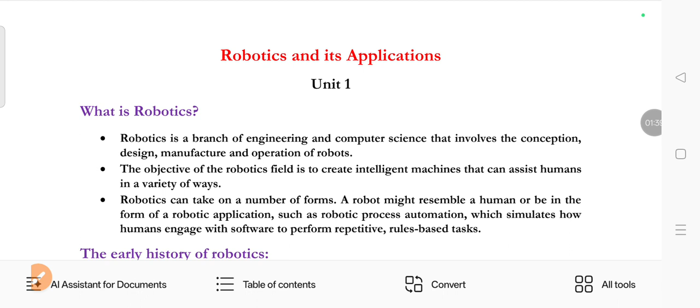Robots can take on a number of forms. A robot might resemble a human or be in the form of robotic applications. Let's see the early history of robotics.

Ancient concepts: in ancient times, as early as ancient Greece, myths described mechanical servants, which can be called automatons. In 1921, Karel Capek introduced the word robot in his play Rossum's Universal Robots. In the 1940s, Isaac Asimov formulated the 3 laws of robotics, emphasizing safe robot-human interaction. In 1954, George Devol invented the first programmable robot, Unimate, later used in General Motors factories.

At Stanford Research Institute, a robot dubbed Shakey followed suit in 1966 as the first mobile robot, thanks to software and hardware that enabled it to sense and navigate its environment in a limited capacity. In modern times, robots have evolved with developments in AI, sensor technology and computing power, leading to robots in industries, healthcare, homes and even space exploration.

Let's see the robotics applications. Today's industrial robots as well as many other types of robots are used to perform repetitive tasks. They can take the form of a robotic arm, a collaborative robot, a robotic exoskeleton or traditional humanoid robots. Let's see some of the applications of robots.

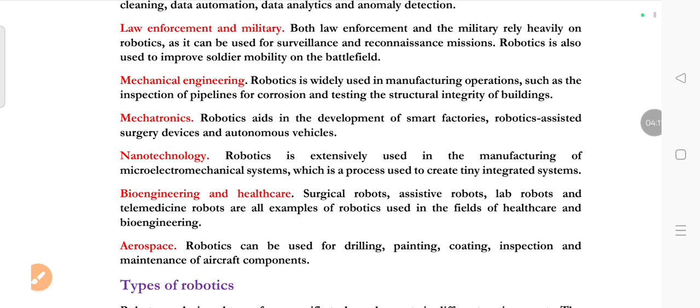Artificial intelligence is something different from robotics, but robotics is widely used with AI and machine learning for predictive maintenance and process automation. It can be used in data science, law enforcement and military, mechanical engineering, mechatronics, and even in nanotechnology, bioengineering and healthcare, and also in aerospace.

Let's see the types of robots. Robots are designed to perform specific tasks and operate in different environments. Let's see some of the common types. Industrial robots can be used in industries to perform welding, painting, assembling, material handling, and similar tasks.

Service robots: examples include cleaning robots, entertainment robots and personal assistant robots. Medical robots assist healthcare persons; robotic surgery systems, exoskeletons, and artificial limbs are a few examples of medical robots.

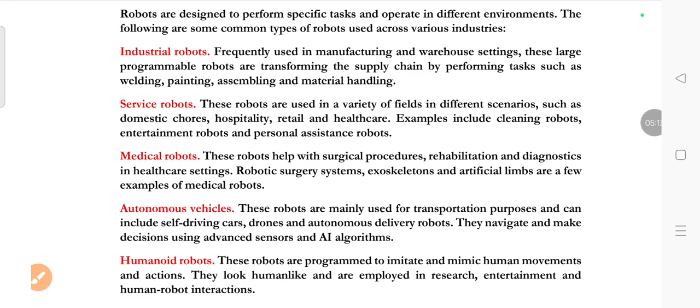Autonomous vehicles mainly include self-driving cars, drones, and autonomous delivery robots. They can navigate and make decisions using advanced sensors and AI algorithms. Humanoid robots take on a human-like structure and are employed in research, entertainment, and human-robot interaction.

Cobots, or collaborative robots, can share workplaces with human employees, enabling them to work more productively. Agriculture robots can help farmers in planting, harvesting, applying pesticides and checking crop health.

Exploration and space robots can be used in space missions. Defense and military robots are specifically designed to operate in unknown territories and assist with military tasks.

Educational robots are mainly involved in the education of kids; they can be used for programming and problem solving. Entertainment robots are created purely for entertainment purposes, and can act as a pet, a humanoid companion, or interactive toys.

Then, components of robotics. Key components include sensors, actuators, control systems, and sometimes end effectors. These components are used to perform tasks autonomously or semi-autonomously. These are the components.

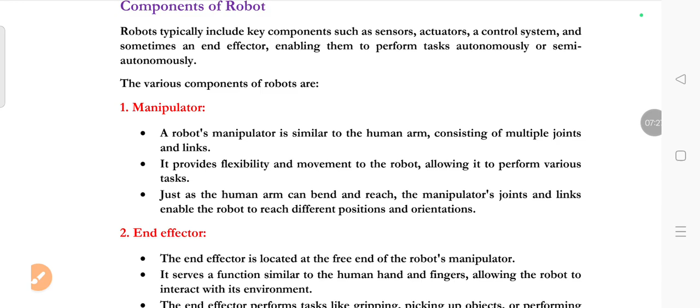The first one is manipulators. It is similar to the human arm and provides flexibility and movement to the robot. Just like a human arm, it can bend and reach different positions and orientations.

End effectors are the tools or devices at the end of the robotic arms, like grippers and welding torches. The end effector performs tasks like gripping, picking up objects, or performing precise actions.

Locomotion device is like a motor that provides the power needed for the robot's movement. They come in various types including electric, hydraulic, and pneumatic.

Controller: the controllers act like a brain that processes data and controls actions, including microcontrollers and CPUs.

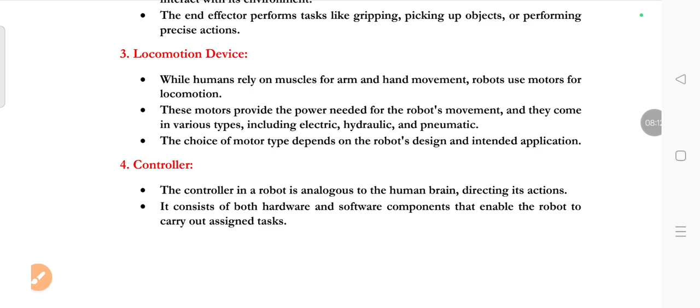Sensors are the most important part of robotics. They detect environmental conditions like proximity, temperature, and light.

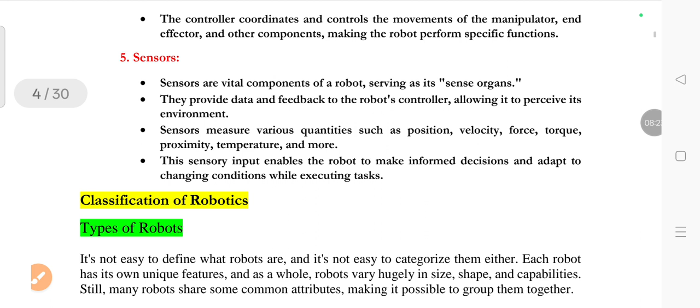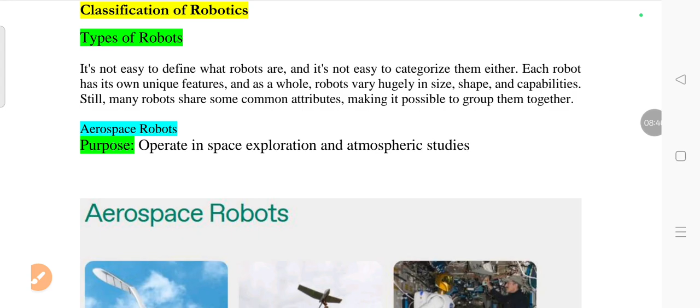Let's see the classification of robotics. Types of robots - I have given some of the robots used in different areas, and each robot has its unique features. As a whole, robots vary hugely in size, shape, and capabilities.

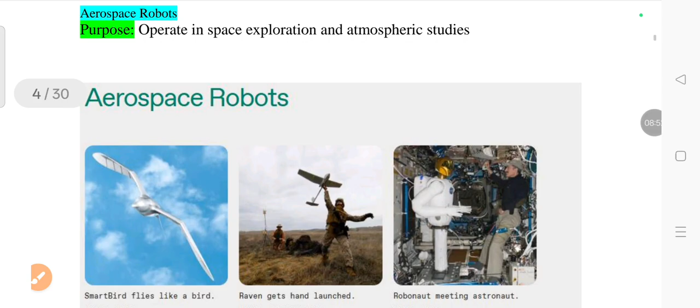Let's see some of the robots. Aerospace robots: the purpose is to operate in space exploration and atmospheric study. Here I have given a bird-like robot and a human-like robot. These aerospace robots are highly used in space exploration.

Then autonomous vehicles. The purpose of autonomous vehicles is self-driven cars, air or water vehicles. I have given a few examples. Robotic cars are equipped with cameras, lidars, GPS, computers, and other sensing and navigation systems that enable them to drive fully autonomously.

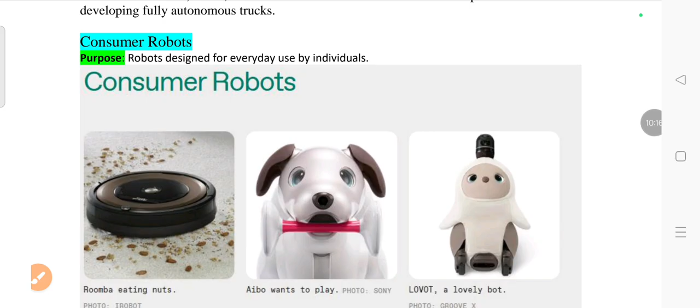Next one is consumer robots. The purpose of consumer robots is designed for everyday use by individuals. I have given a few example pictures. These are the robots you can buy and use for fun or to help you with tasks and home chores.

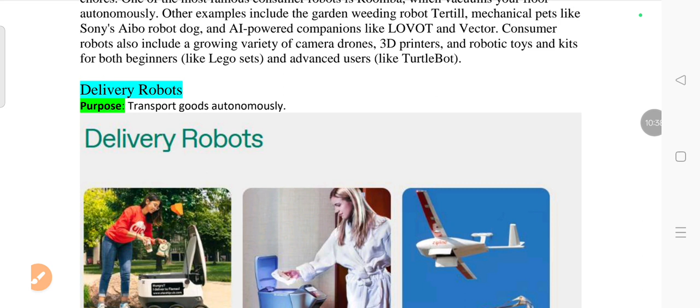Then delivery robots. The purpose of these robots is to transport goods autonomously. I have given a few examples: Starship robot, toiletries delivery, zipline parachute delivery. These robots transport items like foods, groceries and medical supplies from one point to the other.

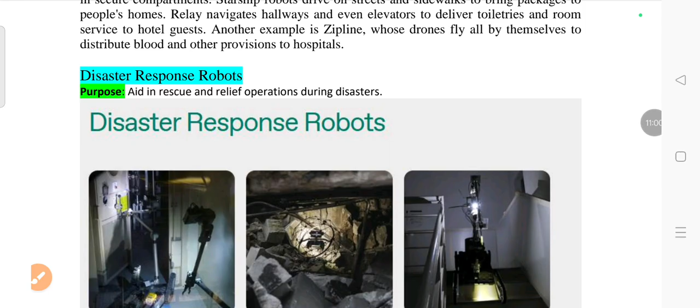Disaster response robot: the purpose of this type of robot is to aid in rescue and relief operations during disasters.

Drones: the purpose of these drones is unmanned aerial vehicles for diverse applications. Without the help of humans, we can use these types of robots for diverse applications.

Educational robots: the purpose of these educational robots is to teach robotics and programming to students.

Next one is entertainment robots. Purpose: amuse and engage users. The entertainment robots are designed to evoke an emotional response. They can make us laugh or feel surprise or wonder.

Exoskeleton: the purpose of these types of robots is as wearable robots to enhance human strength or mobility. These suits are equipped with electric motors that help move the user's body. Some powered exoskeletons can even give the wearer superhuman strength. Exoskeletons can be used for physical rehabilitation and can enable a paralyzed person to walk again, like Ekso and HAL robot suits. Some exoskeletons like the Guardian XO have industrial applications by giving the wearer added mobility, endurance, or the capacity to carry heavy loads. While using the exoskeleton we can feel like a superhuman.

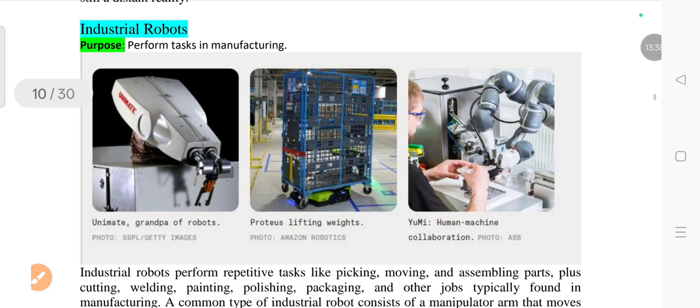Industrial robots: the next one is industrial robots. It is used to perform tasks in manufacturing, like picking, moving and assembling parts, plus cutting, welding, painting, polishing, packaging and other jobs typically found in manufacturing.

Medical robots: these types of robots are used to assist in healthcare and surgeries.

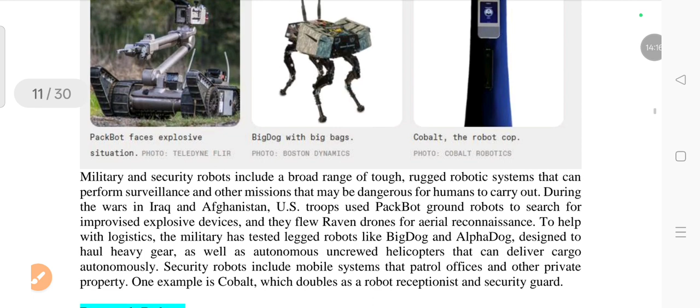Military and security robots can be used for defense operations and surveillance. They include a broad range of tough, rugged robotic systems that can perform surveillance and other missions that may be dangerous for humans to carry out.

The next one is research robots. These types of robots are experimental, built in universities and corporate research labs. Though these robots may be able to do useful things and some may fit other robot categories, they are primarily intended to help researchers do their research.

Next are service robots. These service robots perform useful tasks like cleaning, greeting visitors, or making deliveries.

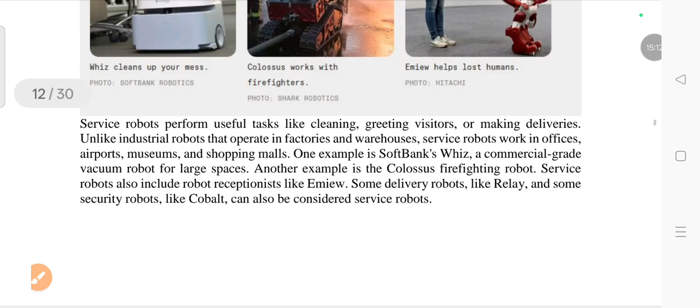The next one is social robots. Social robots are designed to interact and communicate with humans, assist us with daily tasks like grocery lists and calendar events, or simply keep us company and make us smile.

Telepresence robots allow you to be present at a place without actually going there. You log on to a robot avatar via the internet and drive it around, seeing what it sees, hearing what it hears, and talking with the people you encounter in meetings or at a water cooler.

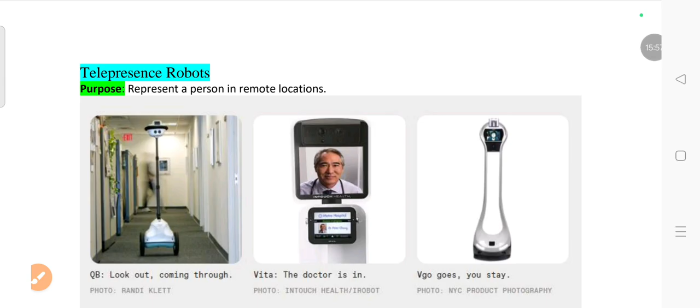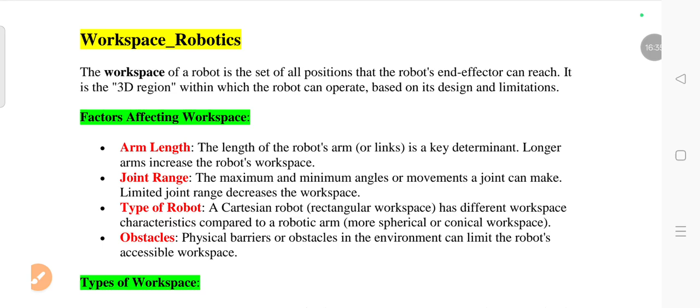So the next one is workspace robotics. The workspace of a robot refers to the entire volume or area the robot's end effector can reach. It depends on the robotic arm's length, number of joints, and range of motion. A large workspace allows a robot to perform more tasks without being repositioned. It's a crucial factor in robotic system design, especially in manufacturing.

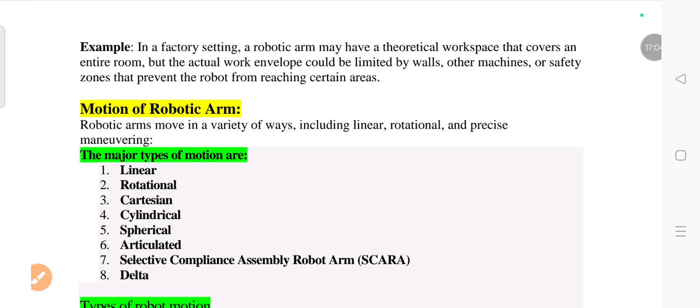Work envelope is the three-dimensional space in which a robot operates. It defines the limits within which the robot can move. Different robots have different shaped envelopes, like the Cartesian robot, which is rectangular box shaped. SCARA robots are cylindrical in shape. Articulated robots are spherical or irregular in shape. Knowing the work envelope helps in selecting the right robot for specific tasks.

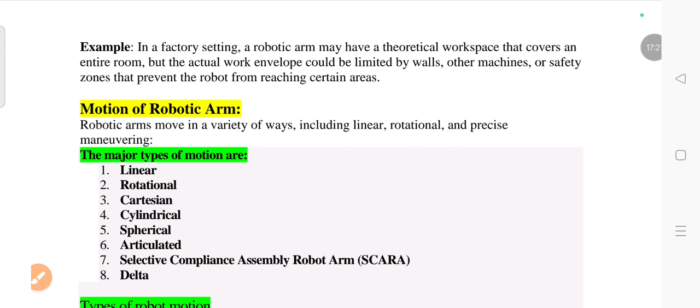The major types of motions are linear, rotational, Cartesian, cylindrical, spherical, articulated, SCARA, and delta.

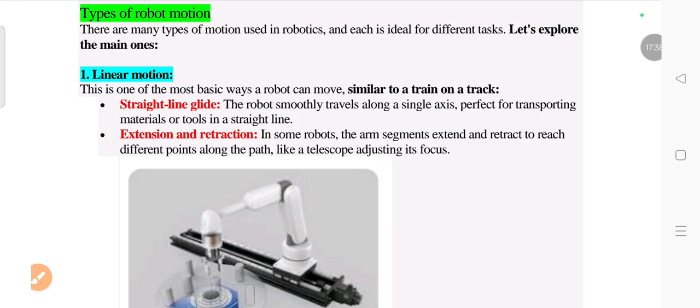Linear motion is one of the basic robotic moves. It works in a train-like structure, going and coming back in a linear motion.

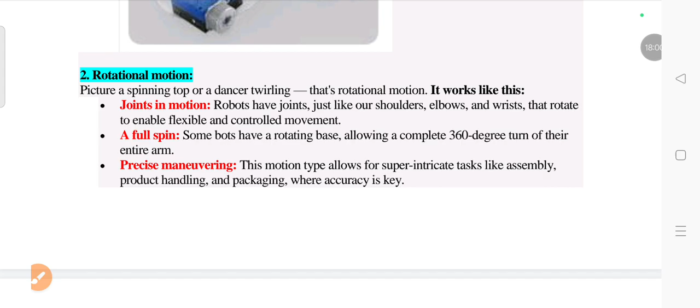Rotational motion is like a cylindrical spinning top or a dancer twirling. It can rotate 360 degrees, turning the entire arm to perform the task. Here I have given some images for you.

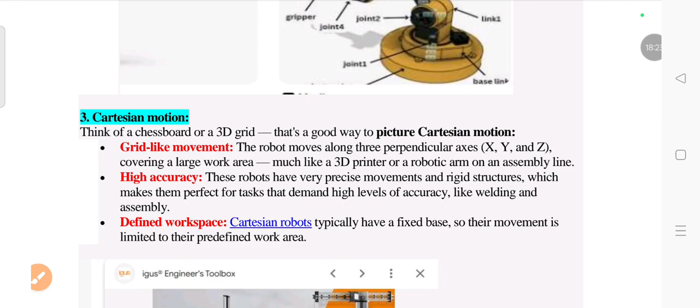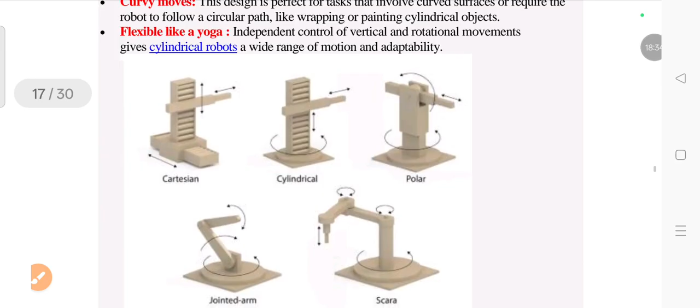Cylindrical motion permits the tool it uses to revolve along a central axis. The tool may also travel up and down the center axis, as well as toward and away from it. With this arrangement, a cylindrical shaped work volume is produced.

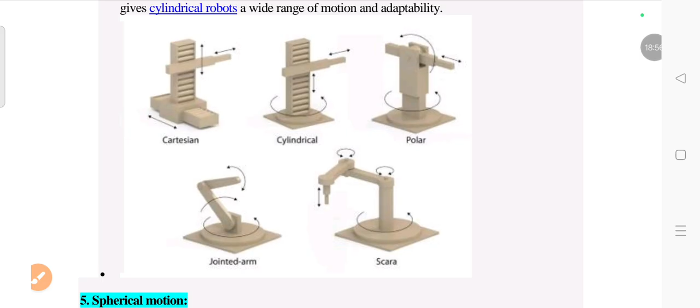Next is spherical motion. This arrangement produces a tool action that sweeps out a workspace with a sphere-like form. It allows the tool to revolve around the primary axis and a second axis positioned at a 90-degree angle to the main axis, and the tool can also pivot around an axis.

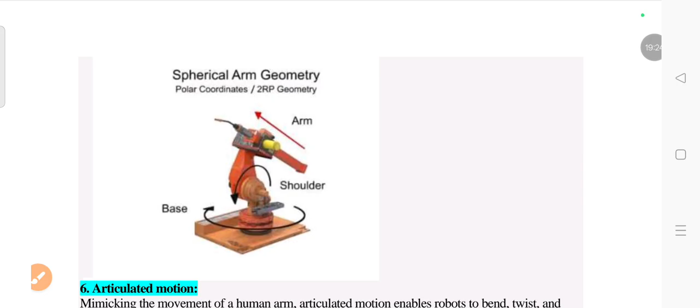Articulated motion is the image of an industrial robot that comes to mind most frequently when the term is used. It must have a wrist joint, an elbow joint, and at least one shoulder joint. Both main and minor axes can be included in many of these setups.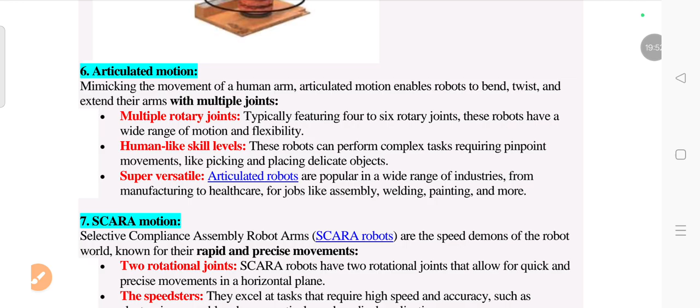Next one is Scara motion. It uses pivot points to enable its tools to move in both cylindrical and Cartesian movements. This enables the tool to move more swiftly and with more ease while making particular motions like an arc.

The last one is delta robot motion. It is the robot configuration type that can move its tool the quickest. To enable its tool to swiftly sweep out its workspace, it employs parallel connection.

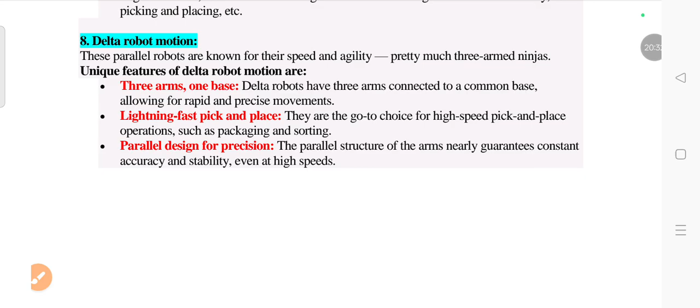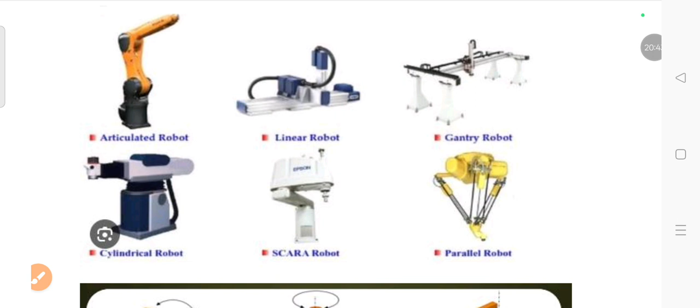Here I have given the articulated robot, linear robot, gantry robot, cylindrical type of robot, Scara robot, and parallel robot examples for your reference, along with a summary of the above information.

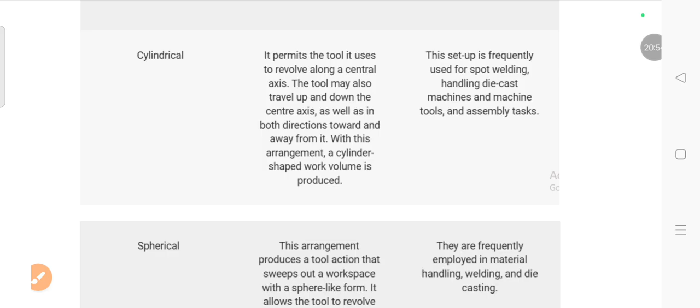Articulated, delta, and all the types of robotic arms. So the next one is end effectors. End effectors are the devices attached to the robotic arm's end used to interact with the environment.

So these are the types of end effectors, the three main categories: grippers, process tools, and sensors. Types of grippers: mechanical grippers, clamp-like gripper, suction vacuum grippers used for suction, and magnetic grippers used for ferrous objects.

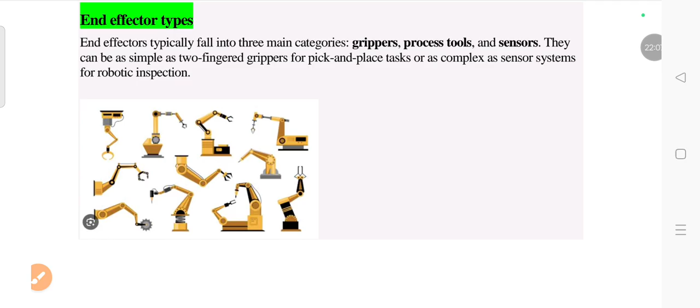Tools: welding torches, spray guns, screwdrivers. All these types of end effectors are used to hold something, some item to work with. The robots can hold items to work with the help of these grippers. Specialized end effectors can be used for medical, agriculture, or underwater applications.

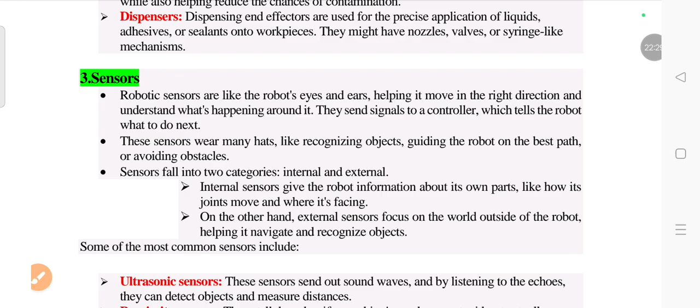So these are the sensors. Robotic sensors are like robotics eyes and ears, helping it move in the right direction and understand what is happening around it. Some of the common sensors are: ultrasonic sensor, proximity sensor, torque or force sensor, and light sensors.

Ultrasonic sensor can be used to measure the distance using sound waves. A proximity sensor is a space sensor. Torque force sensor means push and pull force happening at the robotic wrist and joint. Light sensor lets the robot measure how bright things are.

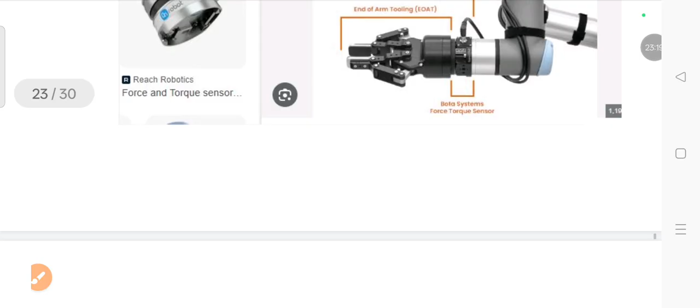So these types of sensors can be used by the robots to send signals to a controller which tells the robots what to do next. So I have given all the types of sensors used in the robots.

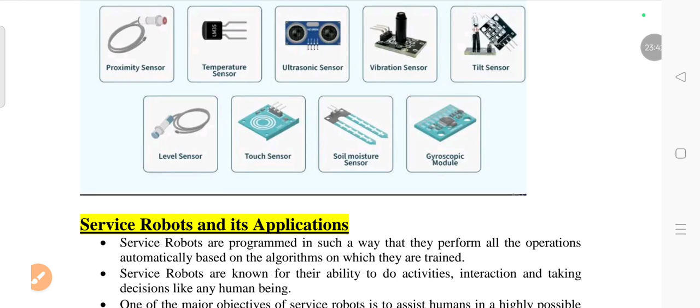So here I have given proximity, temperature sensor, ultrasonic sensor, vibration sensor, tilt sensor, level sensor, touch sensor, soil moisture sensor, and gyroscopic sensor. Gyroscopic means it can be used like an accelerator, in acceleration.

Service robots and its applications. So we have come to service robots and its applications. Service robots perform useful tasks for humans or equipment, excluding industrial automation.

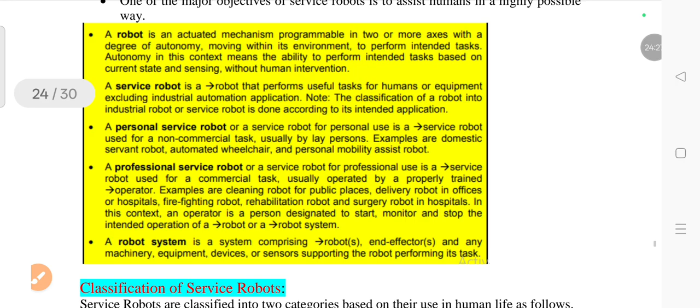So there are some applications: healthcare, domestic, hospitality, security and surveillance, entertainment. So we have seen many of the service robots and their applications. I have given the classification of service robots.

Service robot classification: the first one is personal service robot, and the second is professional service robot. A service robot for personal use is a service robot used for non-commercial tasks by lay persons. Examples: domestic servant robot, automated wheelchair, and personal mobility assist robot.

The next one is professional service robot. These are service robots used for professional use only, for commercial tasks only, usually operated by a properly trained operator. Examples: cleaning robots for public spaces, delivery robots in offices and hospitals, firefighting robots, rehabilitation robots, and surgery robots in hospitals.

In this context, an operator is a person designated to start, monitor and stop the intended operations. A robot system is a system comprising robots, end effectors, and any machinery, equipment, devices or sensors supporting the robot performing a task. So I have given the service robot for personal and domestic uses.

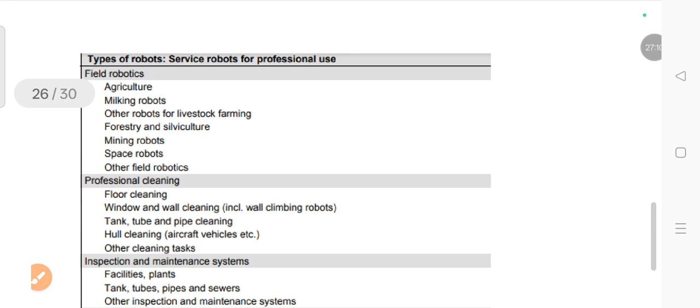So these given types of robots are for professional use. For example, field robots, professional cleaning, and inspection and maintenance systems. In the above slide we have seen the non-professional use, that is personal use robots.

These service robots are for professional use, completely commercial use. First one is field robotics: agriculture, milking robots, other robots for livestock farming, forestry and silviculture, mining robots, space robots, and other field robotics.

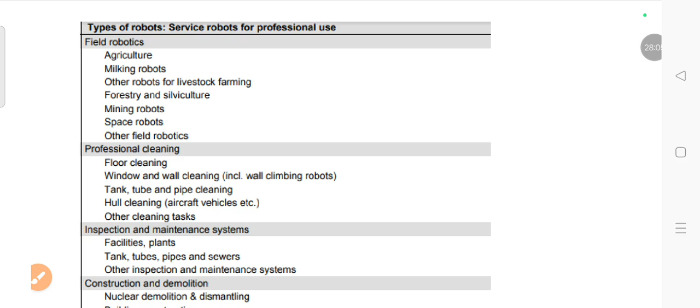Professional cleaning: floor cleaning, window and wall cleaning, these are for commercial purpose only, not domestic purpose, completely commercial. Tank, tube and pipe cleaning, hull cleaning, aircraft vehicles, and other cleaning tasks. Inspection and maintenance systems are also for commercial use only, not non-commercial use.

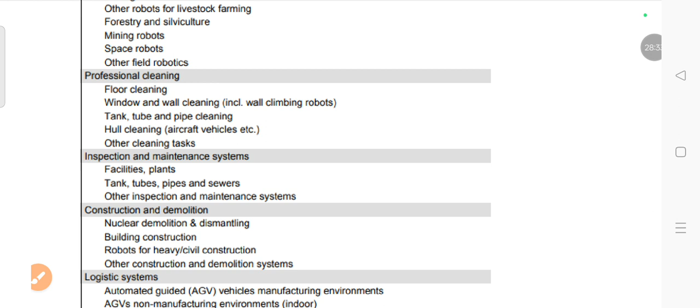Inspection and maintenance systems for facilities, plants, tanks, tubes, pipes and sewers, and other inspection and maintenance systems. Construction and demolition, including nuclear demolition and dismantling, building construction robots, heavy civil construction, and other construction and demolition systems.

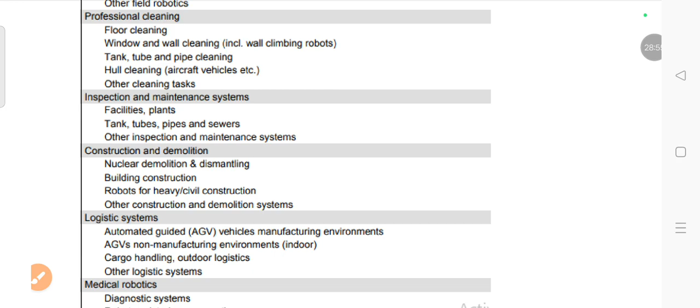Logistics systems: automated guided vehicles for manufacturing environments, AGVs for non-manufacturing environments, indoor cargo handling, outdoor logistics, and other logistics systems.

Medical robots. We have seen enough for medical robots, including diagnostic systems, surgery assistant systems, rehabilitation systems, and other medical robots.

Rescue and other security applications, defense applications, demining robots, unmanned aerial vehicles, unmanned ground based vehicles, unmanned underwater vehicles. We have seen enough examples for these defense, medical, and rescue security application robots.

The last topic is artificial intelligence in robotics. Robotics is something different from artificial intelligence; it is a separate entity. AI helps the robots to be intelligent.

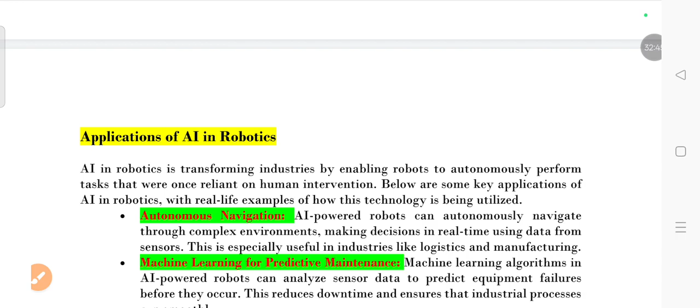We are using AI powered robots in our day to day life: voice assistants like Siri, Alexa, and Google Assistant; streaming services like Netflix and Spotify that recommend movies, shows, and music based on user viewing habits; social media algorithms, email providers, and fraud detection in finance.

Unknowingly, in our day to day life, we are using robotics without realizing that we are using robots.

AI empowers robots to handle unpredictable environments, making them smarter, more flexible, and more efficient. AI plays a critical role in enhancing robot intelligence and autonomy. Autonomy means robots make decisions without human input.

Machine learning allows robots to improve performance based on data and experience. Computer vision lets them recognize objects, people, and scenes. Natural language processing allows them to communicate with humans through speech and text. Path planning enables navigation through complex environments.

In today's section, we have explored some important basic concepts of robotics, including an introduction to robotics, brief history, workspace, classification, components, work environment, motion of robotic arm and end effectors and types, and service robots and their applications.